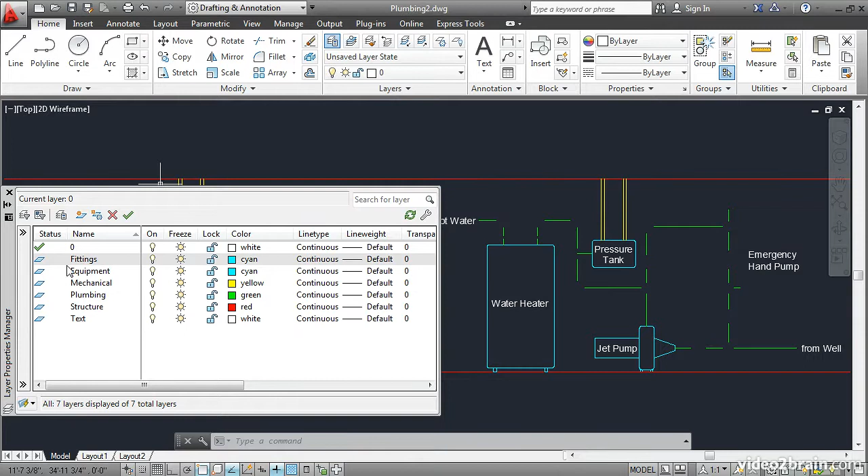Click the Layers button to open the Layer Properties Manager, then click this button to create a new layer. Call the new layer Fittings, and give it a color of cyan. Make that layer current by double-clicking on its icon, then close the Layer Properties Manager.

Click the Insert tool on the Block panel. A list of blocks defined locally is available in this drop-down. I'll move this out of the way, and let's see what we need to insert.

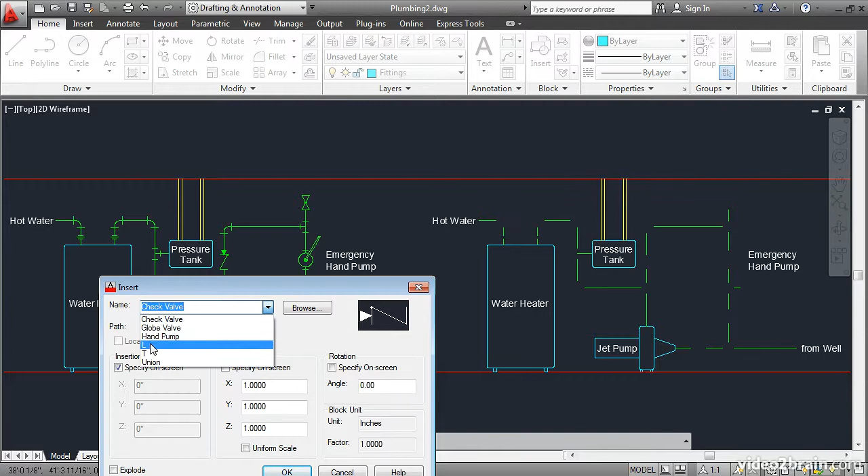Over here it looks like we need an L, so I'll choose that from the list and click OK. I'll zoom in over here and click right here.

So the block has been inserted, but it still needs to be rotated. I'll click the Rotate tool, select this block, press Enter, click this as the base point, and turn on Ortho so that I can rotate it around like that.

Then I'll click Insert again, and we need another L over here. This time, instead of rotating it as a separate command, I'll choose to specify the rotation on screen, then OK. I'll click here, then move the mouse until it orients appropriately, and click.

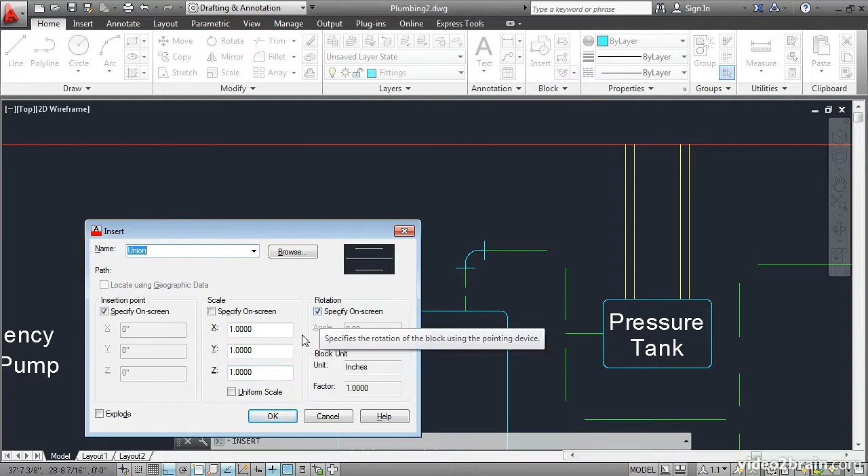This time I'll press I-Enter to execute the Insert command. I'll choose Union. Notice that the option I selected before is sticky—it stays the same until I decide to change it. I'll click right here, then rotate the mouse around until it looks right, and click again.

Now you don't have to insert a block every time—you can copy existing blocks if you like. I'll copy this object from this point to this point, then press Enter.

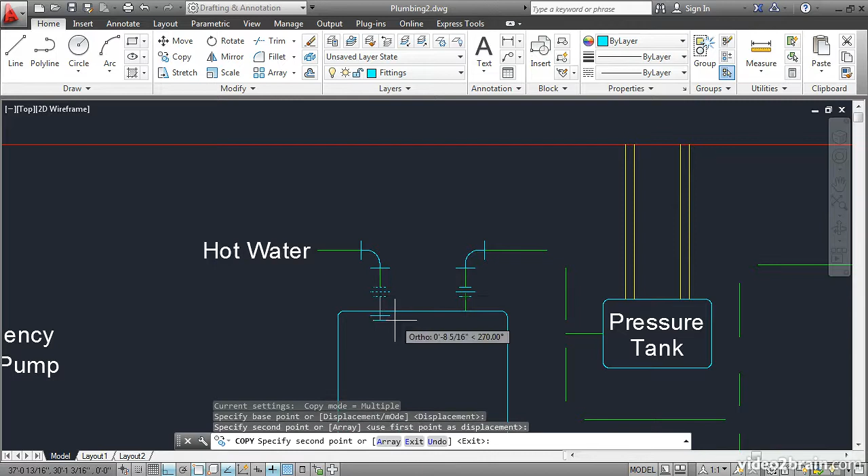I need to compare with the diagram to see where we need to go next. It looks like we need another L, a T, and an L. So over here, I'll type I-Enter. We'll get an L, Enter, click here, and click again. Enter, Enter. Click here, and click here.

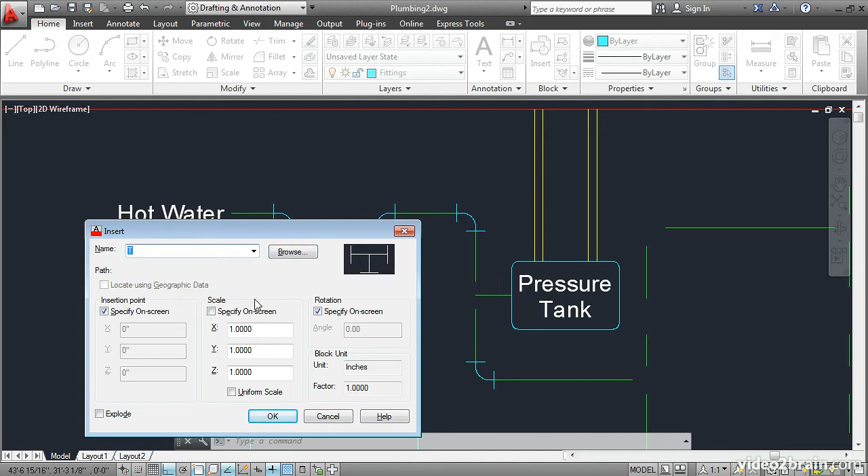Now we need a T. I'll press Enter and select T. Enter, then click here, and click above.

I'll zoom out and see what's next. We need another T over here. We need a check valve and an L.

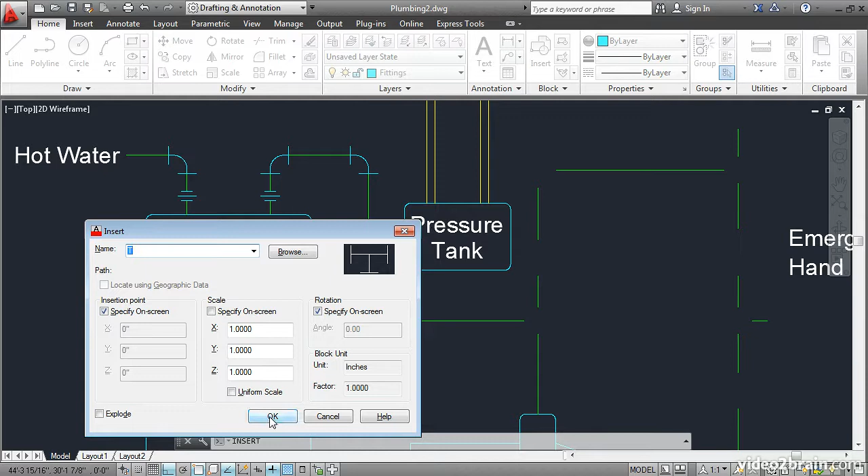I'll type I-Enter, and we'll put in another T. Then we need a check valve.

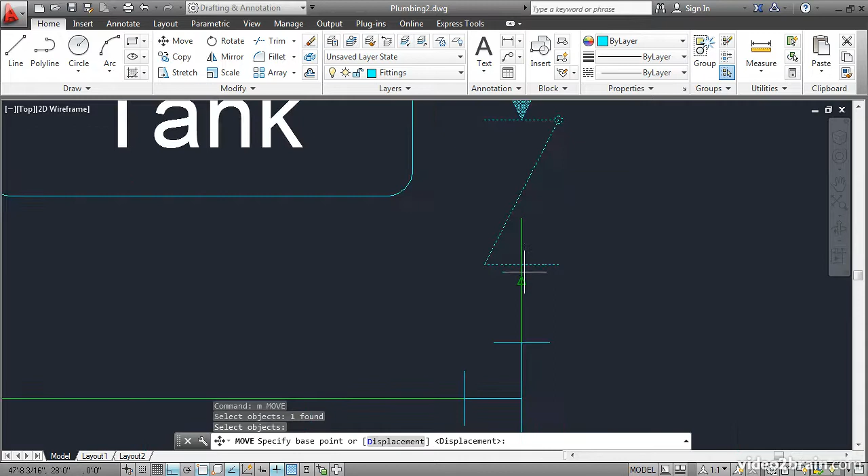Now this one needs to move up. It looks like maybe the plumbing lines are a bit too long. I'll type M-Enter and move this up from this midpoint to the end of the line. I could make this plumbing line a little bit shorter by using its grip just to move the line up.

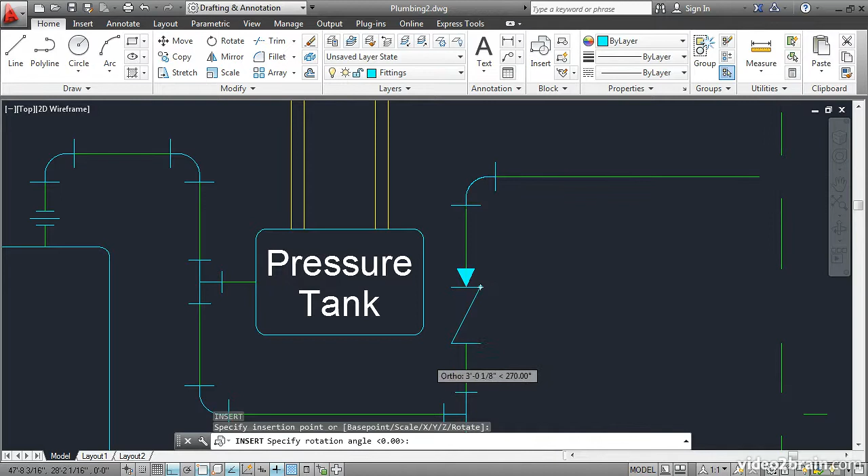I-Enter, select elbow, Enter, click here, and then click below. We need a globe valve at the top, a T, and then the hand pump.

I-Enter, globe valve, Enter. I'll click 2 points to specify the insertion point and the rotation. Press Enter again.

Select T, Enter, and then the hand pump.

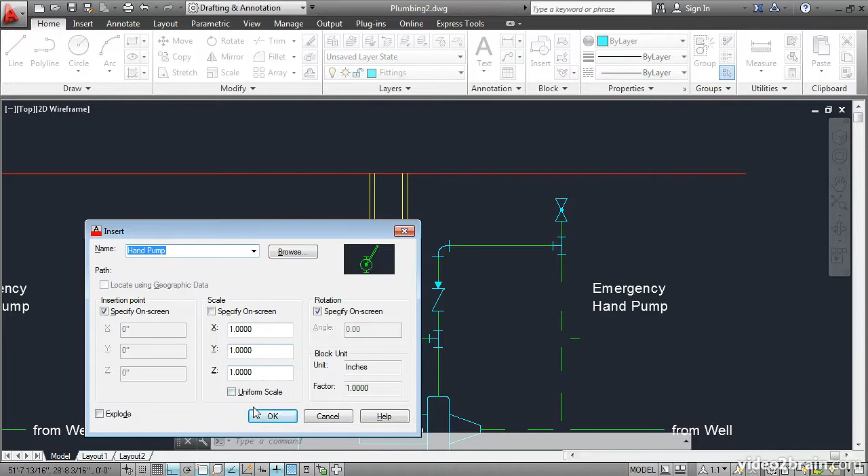Now the hand pump comes in as green because it was defined on a specific layer, while all the other blocks were defined on layer 0. So they assume the qualities of the layer they are inserted on, but that's not so with the hand pump.

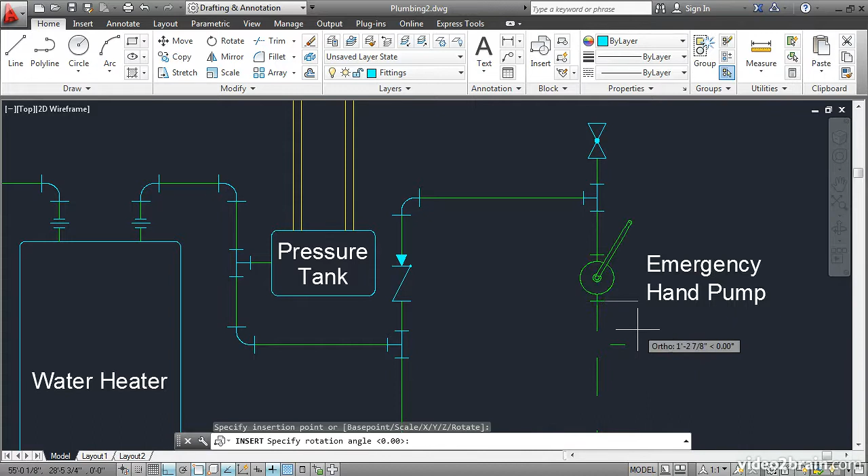Let's see, what else do we need? Another T, 2 more globe valves. Insert T, insert globe valve.

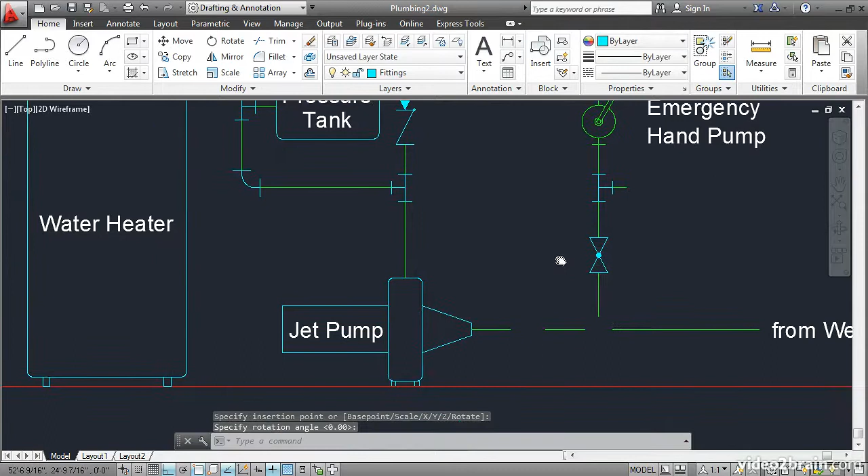And then down here, what do we have? Another T and another globe valve.

Save your work as Plumbing 3. In this lesson, you learned how to use the Insert command to create a number of block references, and learned how to rotate them as you insert them into the drawing.